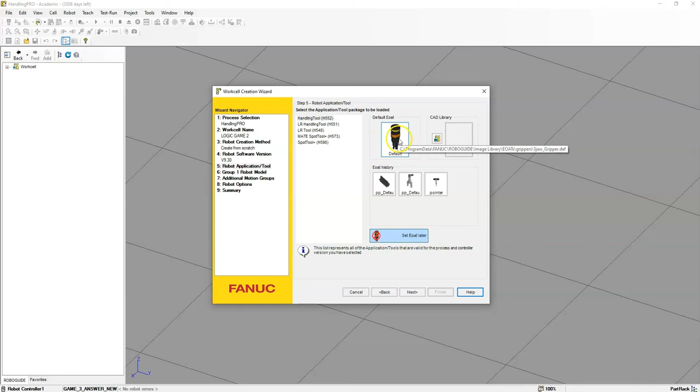a new work cell, handling pro, call it what it is. Pick your version and pick your tooling. So we're going to go to the 3-jaw if it's not already there. So we're going to go to grippers, find the 3-jaw chuck, and we're going to use the R2000 iC 165F.

And we're going to continue next, and then finish. And then we're going to allow this teach pendant to update. So the question about flange type, we're going to do standard. So we're going to go 1, enter, and allow the cell to initialize.

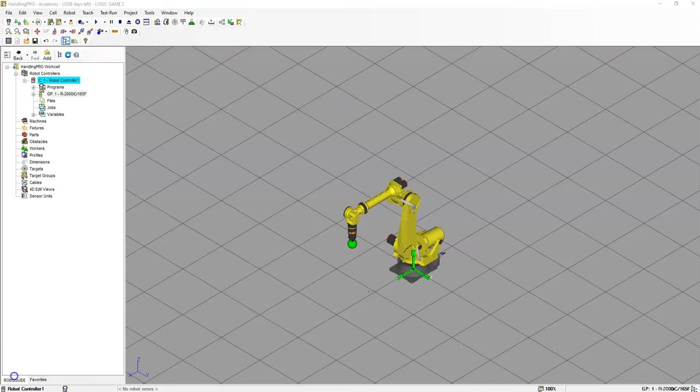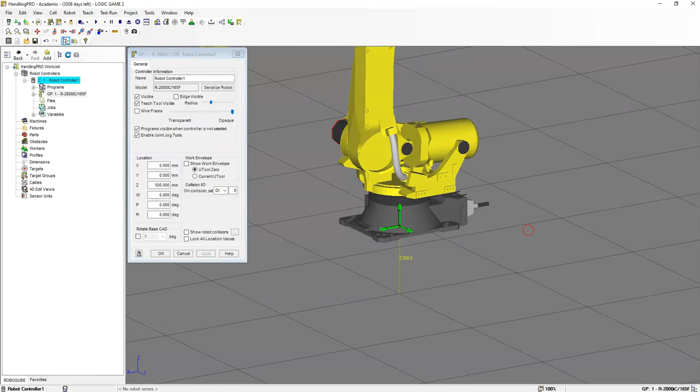Now that the cell is initialized, let's start putting together the cell, and this cell is the same between all the different logic games. So the first thing we're going to do is add a plate underneath our robot. So we're going to move our robot up 500 millimeters. So we bring her up, and we're going Z 500. So we're now 500 off the ground, and we're going to add a robot table to this.

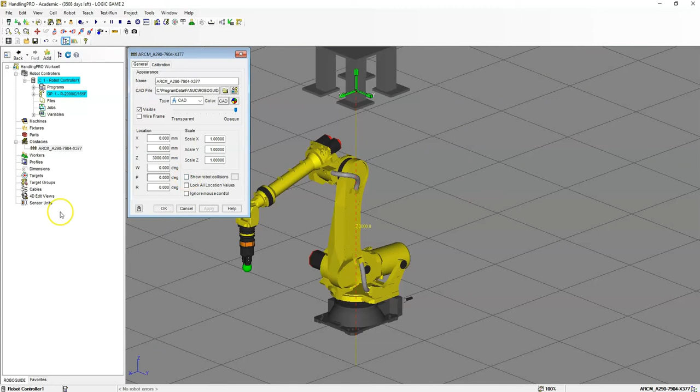So I'm going to go to cell, obstacle, CAD library, and we're going to go to robot bases, and we're going to use the first one here, which is the A290-7904-X377. We're going to bring it down so that the Z is 0. And we're also going to change the size of this as well.

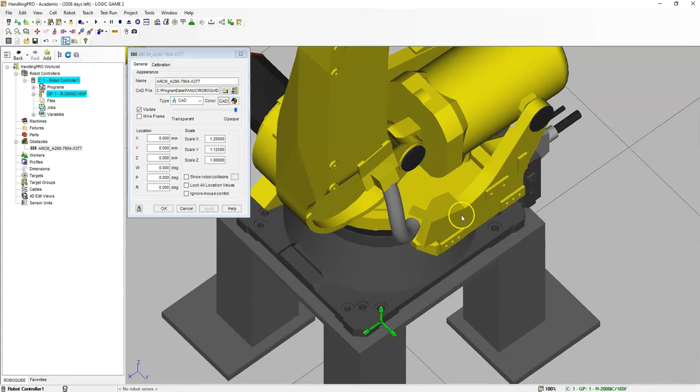So the size in the X is going to be 1.25. The Y is going to be 1.125. And then the Z is going to be 1. So when I hit apply, it now should fit perfectly on the base with a little bit of extra all the way around. So now that we have this, we're going to lock our location and hit OK.

Next, let's add the table. So we're going to go cell, add fixture, and then CAD library, and we're going to find the tables, and find the table with legs, and we're going to modify the size so that the X scale is going to be 1.25, the Y is going to remain 1, and the Z is going to be 2.

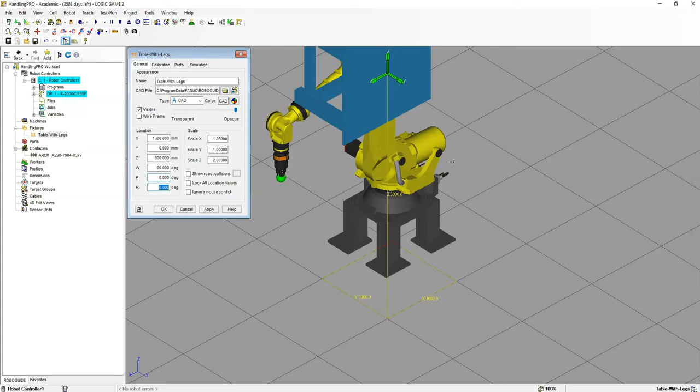Then the X is going to be 1600, the Y is going to be 0, Z is going to be 800, the W is going to be 90, the P is going to be 0, and then the R is going to be 90 as well. And when I hit apply, it should be directly in front. And I'm going to lock the location of this, hit OK.

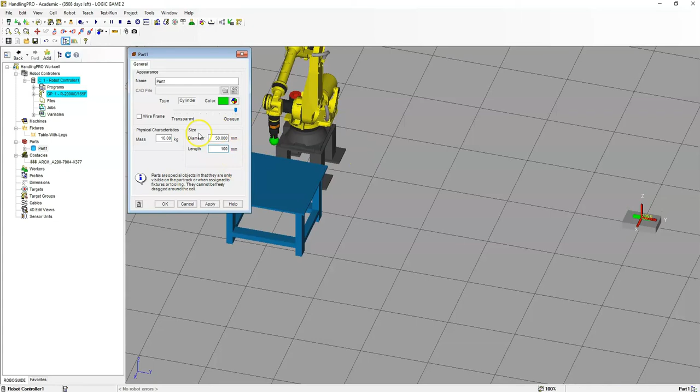Next thing we're going to do is create the part. So we're going to go cell, part, and we're going to create a simple cylinder, and we're going to change the size to diameter 50 and 100, and we're going to have a 2 kilogram mass for this.

Okay, so now that we have the main cell set up, let's now set up our main UTool. So let's double click our 3-jaw chuck. Let's go to UTool, and let's just make sure that the triad is the correct direction, where the Z plus is up, Y is to the right, and X is forward.

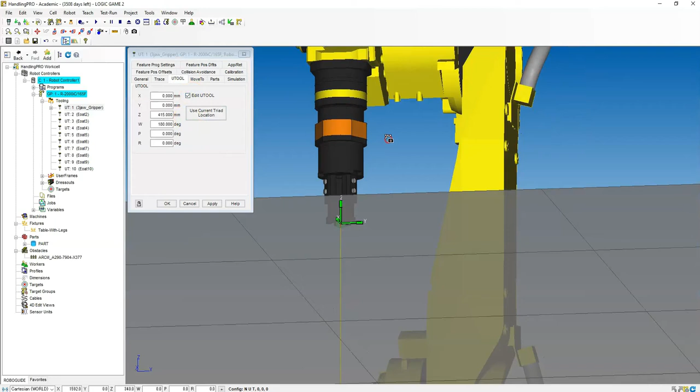Let's go edit tool, and let's just double check everything. Looks like everything is good, so we're at 415 Z, W 180. So if you need to modify that, you can use current triad location and modify these numbers. So let's hit apply on that. Let's go to parts, and we're going to add a part. Let's hit apply on that so we can see our part.

Now we need to modify the rotation of this. So we're going to edit part offset, 415, and we want to modify the W so that the triads are the correct direction. Right now it's downwards, so we need to modify this to -90. And now we have our triad Y positive.

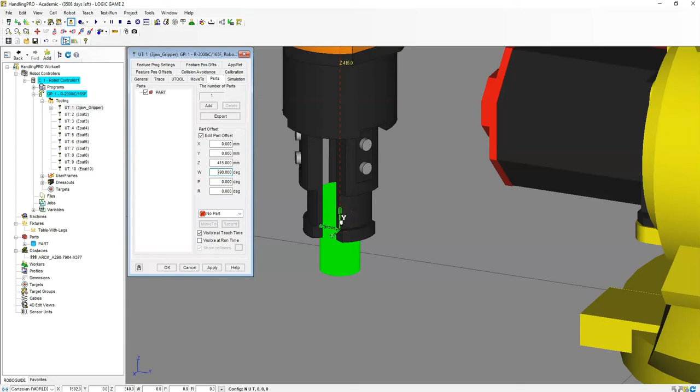And we just want to make sure that these are matching when we add it to the tabletop games scenario. So the Z is going to be to the left, the X is facing forward, and the Y is facing up. So let's hit apply on this. Let's hit OK. And now we're going to set up the actual jaws. So we'll hit the plus next to the 3-jaw gripper. And let's double click jaw number 1.

And we want to make sure that all these match. So it should be 0, 0, 0, 0, negative 90, 0, and those should be all good. We're going to go on the Z-axis. Let's go to the motion.

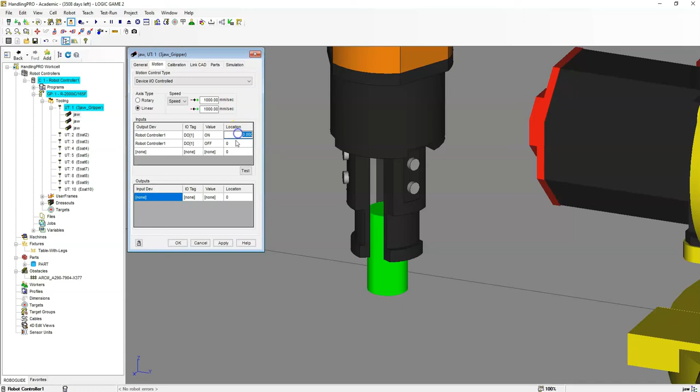We're going to switch this to device in and out, linear motion, and we're going to go speed of 1000, both forward and back. It's going to be a very quick speed, and we're going to be using robot controller number 1, and we're going to use digital 1 for our opening and closing. So one's going to be on, one's going to be off. So when it's off, it's going to be at our open position, and closed is going to be at 20.

And we can test that to see what that looks like. So off means it's open, on means it's closed. So if I go test, you can see it move open, and then if I go up here and go test, you'll see it go closed. So the open and closed.

And then for the outputs, we only need to put this on one of the jaws because they're going to go at the same exact speed. So this is going to be digital input number 1, and this is going to be digital input number 2. And both of them are going to be on, so location is going to be 0 and location is going to be 20. So again, we only need to do this for one of the jaws. So I do it for the first one, and you don't have to do it for any of the other ones. So I'm going to hit apply and OK, and let's set up the second and third jaw.

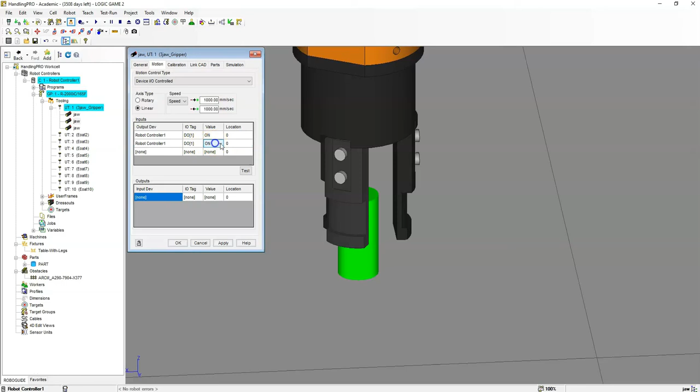So the same exact thing, go to the motion, and we're going to do a device in and out, linear motion, speed of 1000 millimeters per second. Output device is going to be still the robot controller number 1, so that they all turn on and go at the same time when we call for it. There we go. So now that is open. Now we're going to go to the next one. Remember, we do not need to put an input or an output.

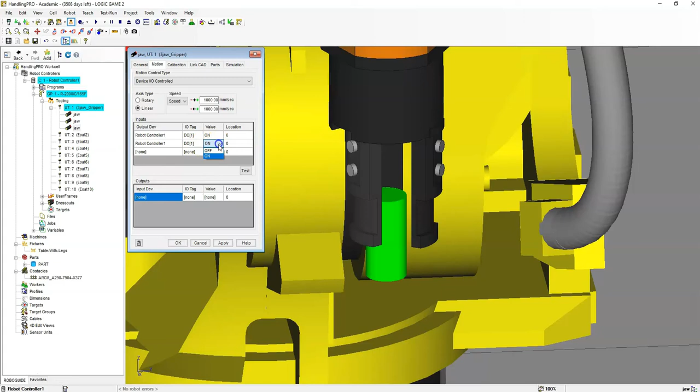Let's go to jaw number 3, and we're going to go device in and out, linear, speed of 1000. Robot controller number 1, and then digital 1, digital 1. One's going to be on, one's going to be off. On is going to be at 20. We do not need to put an output. So let's hit OK, and everything is now set up for our jaws opening and closing.

Let's create the simulation program for the gripper open and close. So let's go to Teach, Add Simulation Program, and we're going to call this one Gripper Open. And when the gripper is open, we're going to utilize digital output number 1, and that's going to mean we're going to be off. So we're going to wait for digital input 2 to be on. So digital 1 off, wait until digital 2. So we're going to hit play on that. Should remain open.

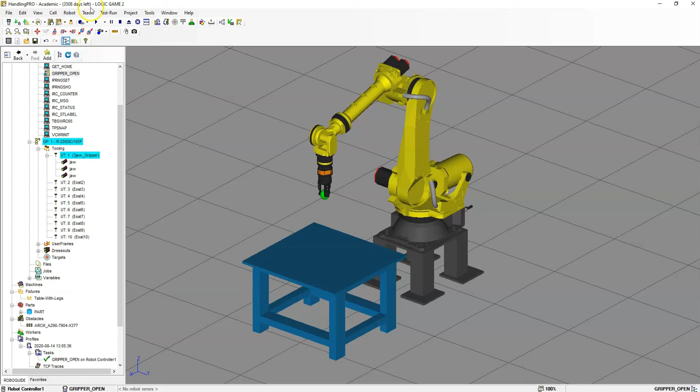Then let's start the close process. So we're going to go Teach, Add Simulation Program, and we're going to go gripper closed. Hit OK. And we're going to go digital output number 1 to be on, and we're going to wait for digital 1 to be on. And when I run this program, it should close. There we go. So now we have our opening and close program to call.

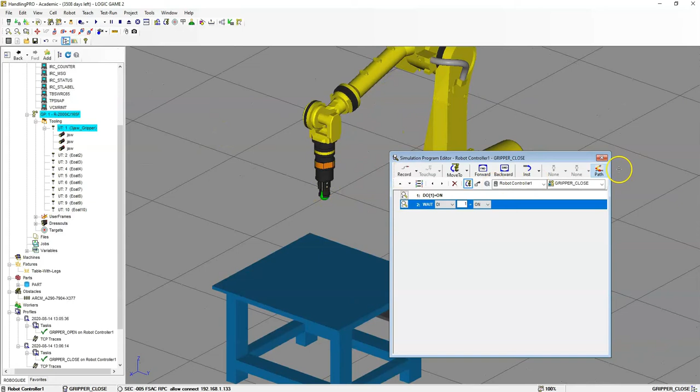Let's turn on Teach Pendant and set up some position registers. So I'm going to go to Data, Type, Position Registers, and we're going to go, first one is going to be Home Position. Next one is going to be Safe Position. Third one is going to be Game 1, so this will be the logic cell number 1. Starting point. Game 1 end. Then we have Game 2 starting point.

So I have my start and end for all 3 games because again, this cell is the same setup. It's just the board is just a little bit different. Then for position register number 10, we're going to do our tool offset. And then going down to number 12, this is going to be our game offset. So this is going to be game 1 X, Y offset, or you can just call it offset.

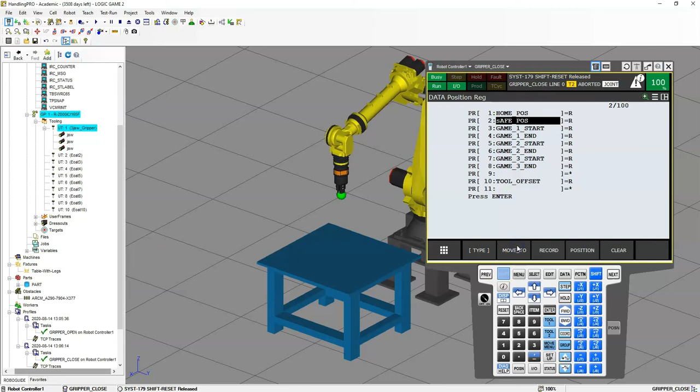For our safe position is going to be 0, 831, we'll just go 832, 356, 0, 0, and then negative 90. And if you want, you could just go move to, which will move to our safe position.

Let's go to our tool offset. So go to position, tool offset is going to be 0, 0, 0, 0, 0, 0, and then we're also going to change the Z tool offset to 200. And let's go to the game 1 and game 2 offsets. Let's go to position, and let's make that zeros down the board. Let's go to game 2 position, zeros down the board. And game 3 position, zeros down the board.

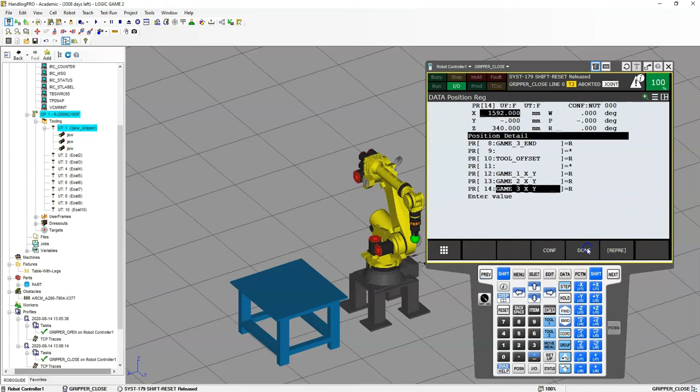Go to type. Let's go to normal data registers, and here we're going to type in. The first one is going to be our speed. Then we're going to have our column counter. Then our row counter. And if we need to, counter number 1. And counter 2.

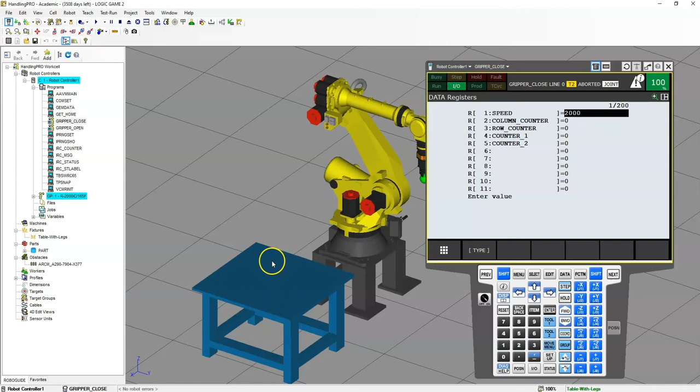And speed, we just set to 2000 right away. The rest will be utilized inside the actual program, so they can remain as 0. So now this is where the two cells are going to kind of start parting. In logic game number 2 and logic game number 3, this is where the board is going to be different, and the position registers for the start and end are going to be different as well, along with the programming.

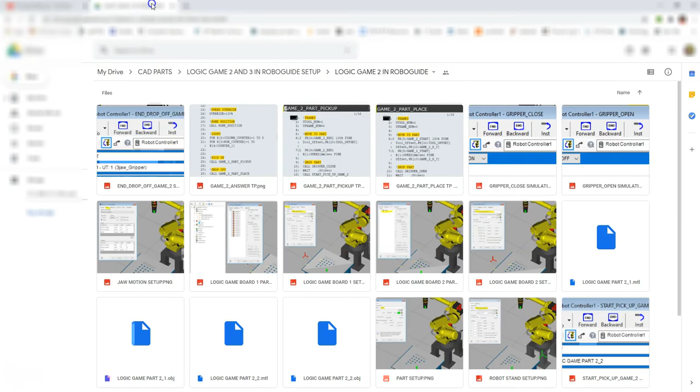Let's go find the parts on the web. Let's go to the YouTube page under the About. Find the one that says Cell Setup, Logic Game 2 and 3. It will bring you to this page right here. We want to download our part files. This also has setup folders as well with the programs. So I'm going to grab these and download them all.

Once I downloaded the folder, I placed and unzipped the folder into the work cell in my documents. So I have everything inside here, including all the parts and pictures inside this work cell. So here's my logic game number 2. Now when we bring in our parts, we're able to easily move them and export everything really easily. So let's go to cell, add fixture, and single CAD file.

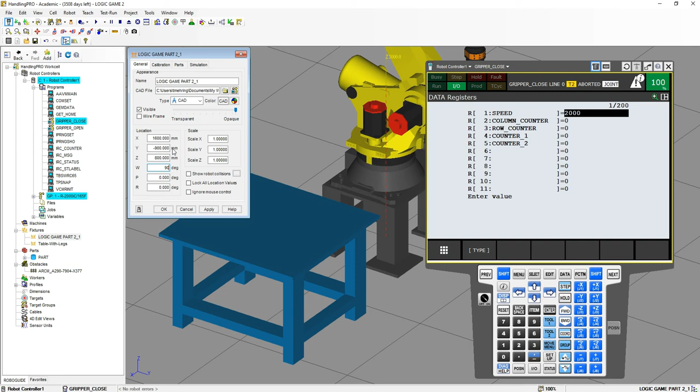We're going to go to the folder where your actual cell is being created, inside the folder that we downloaded, and we are going to load part 2.1. Hit open, and here are the coordinates for that: 1600, negative 900, 800, 90, 0, 90. When we hit apply, we will have our part in the correct area and the correct direction. So I'm going to lock the location and hit OK.

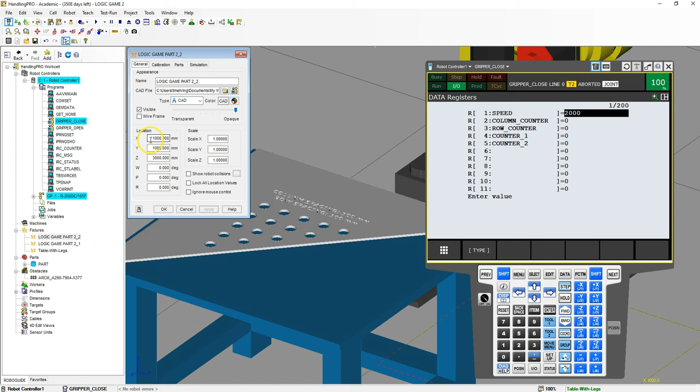I'm going to bring in the second part then. So we're going to go Cell, Add Fixture, Single CAD File, and Part 2.2. Hit Open. Then we're going to put in the same coordinates for this as well: 1600, negative 900, 800, 90, 0, 90. And now we have our part in the correct area. We're going to lock locations and values.

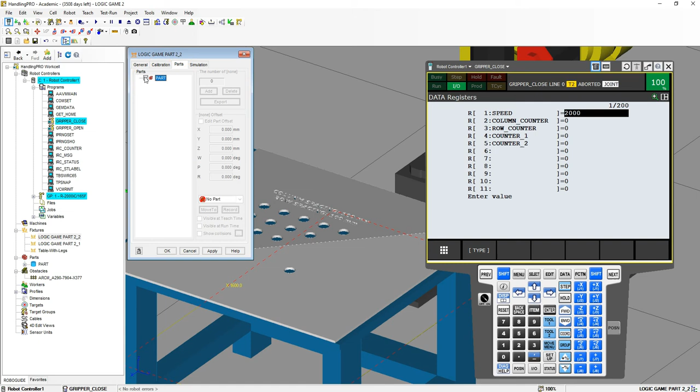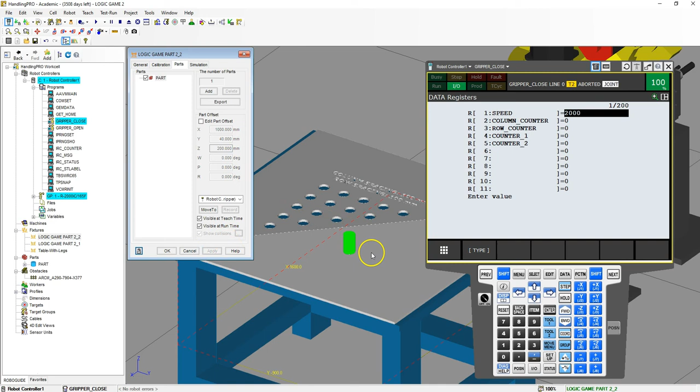Now let's set up the parts and simulation. Let's go to parts, and I'm in part 2.2, hit part, apply, and then we need to move that part to the correct area. We're going to edit part offset: X is going to be 1000, Y is going to be 40, Z is going to be 200, and the WPR is good because the Y is going straight up, X is going to the right, and Z is going forward. We're going to hit apply, and this is going to be the pickup area, so this is going to be visible at runtime.

Let's go to simulation, and we're going to click this part. This is going to be where it's going to be picked up. So let's uncheck place, and we're going to pick up, say every 2 seconds we're going to have one be created. We're going to hit OK, and now our pickup area is all good.

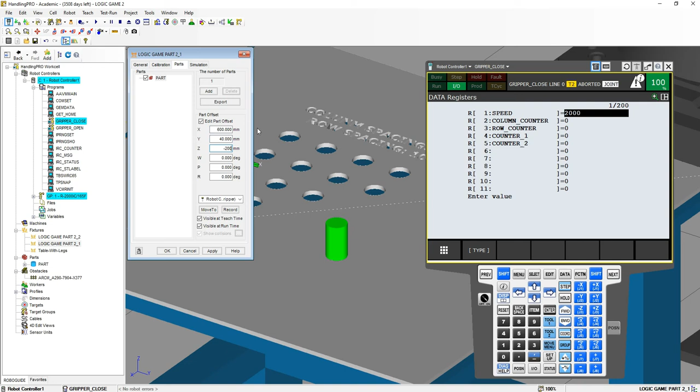So let's now move to part 2.1. Let's double click 2.1, and let's go to parts. Here's our part. The first thing we need to do is move it into place. So let's click our part. We're going to hit apply, and we're going to edit the part offset, and this is going to be 600, 40, negative 200, and it should be in the lower left corner.

Then we are going to go to simulate, click part, and this is going to be allowed to place. So we uncheck the pick and then the place, and we're not going to destroy after this amount of time. That means it's going to remain there after we place it until we're done with the cell. Let's go to parts then. This will not be visible at runtime, so let's uncheck visible at runtime for our first part.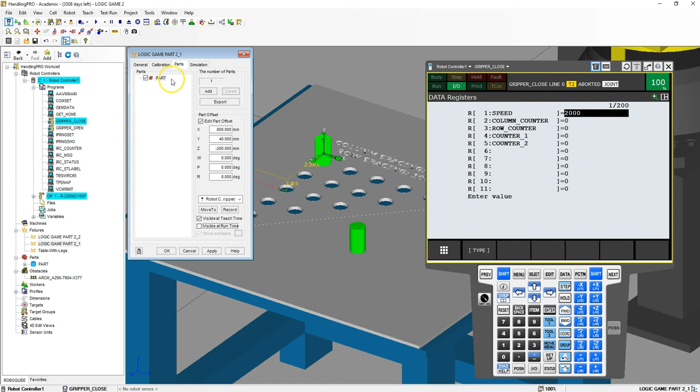And then we're going to array this. So let's go add, and we are going to do an array of 5, 1, 5. So 5 in the X, 5 in the Z, because it depends on the triad here. So X is this direction, Z is this direction. We're going to have a spacing of 100.

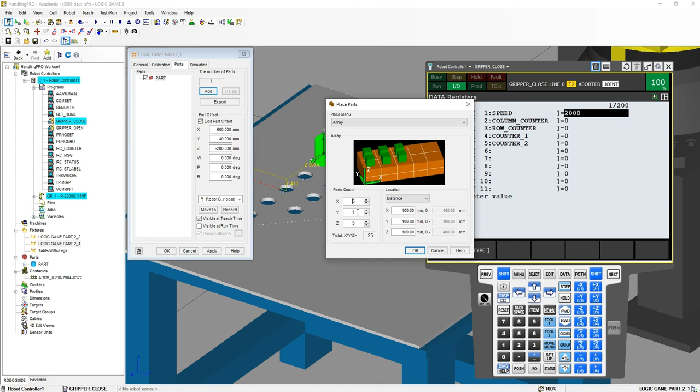Y doesn't really matter, so I just put 100 anyways because we only have one. So that means it's going to create just a single row for our array. Let's hit OK, and then we will have the total array. And here's where you now need to go through and delete the ones we do not need.

So for row 1, we're going to need all 5. So row 1, all 5. Row 2, we're going to have everything except the last one. So right here, 2.5, we're going to delete. We're going to uncheck the 2.5, and we're going to go to row number 3, in which we're going to do the last 2. So uncheck the last 2.

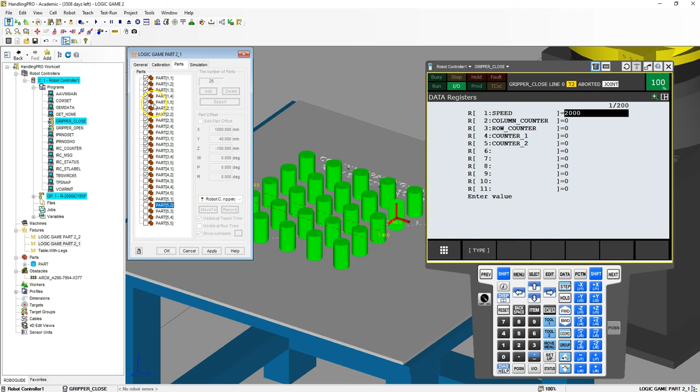And then row number 4, we're going to uncheck the last 3. And then the row number 5, we're going to uncheck the last 4, so you should only have 1 left over. So it should go 1, 2, 3, 4, 5, all the way down. So then when I hit apply, we will be left with just the angled rows.

And because we had these all set up before we arrayed it, you'll see all of these are invisible at runtime. Same thing with the simulation. All these simulations are going to be destroyed after 999. So these are all good. So we're going to hit OK. And the last thing we're going to do for this cell before we start looking at the pictures for the actual program is teach the position registers for the start and end.

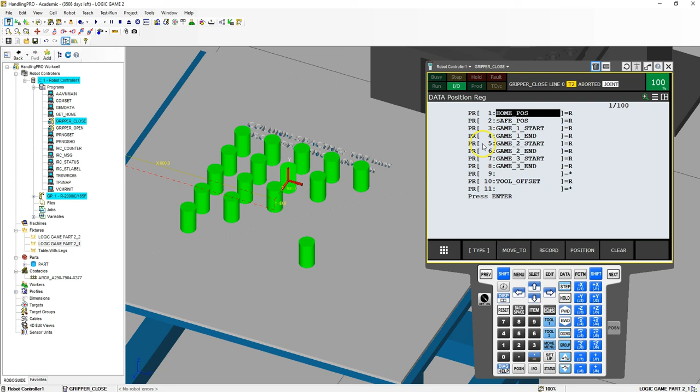So let's go to data, and let's go to the position register, and we're going to go here where it says Game 2 Start. So we're going to start right here. So I'm going to double click this piece right here, go to parts, and then move to, and it'll move to this position. So here's Game 2 Start. So we go shift record. So now that position is now recorded.

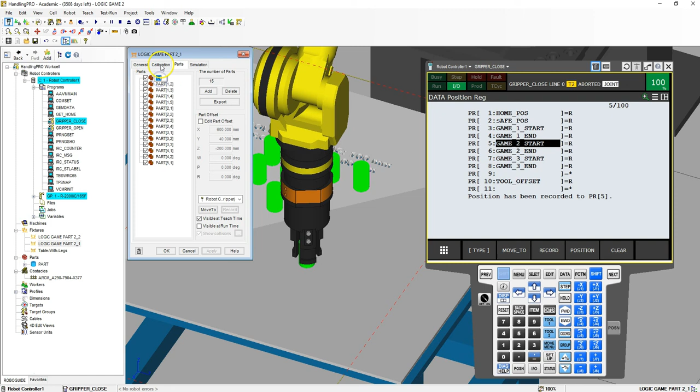Close out of here. Double click this one, and we're going to move part 1, 1. So we're going to go move to. There's the end part. So I go to position register number 6, and we're going to go shift record. So now those 2 points are recorded. So we have the start and end point. Hit OK. And then we need to start programming.

So we'll create the 2 simulation programs for pickup and close. So we're going to go to Teach, Add Simulation Program. And this simulation program is going to be, since we're at the end here, we're going to call it End Drop Off Game 2. So End Drop Off Game 2. Hit OK. And this is going to be our drop off.

So we're going to instructions, we're going to drop, and we're going to drop the part, and there's only one area we can drop it, which is Logic Game Part 2_1. And make sure that the part says asterisk in there. So it'll default to asterisk, but just double check to make sure that it is. So then we're good on that one.

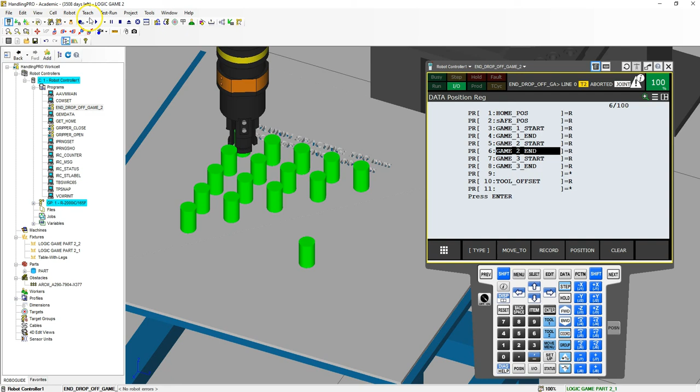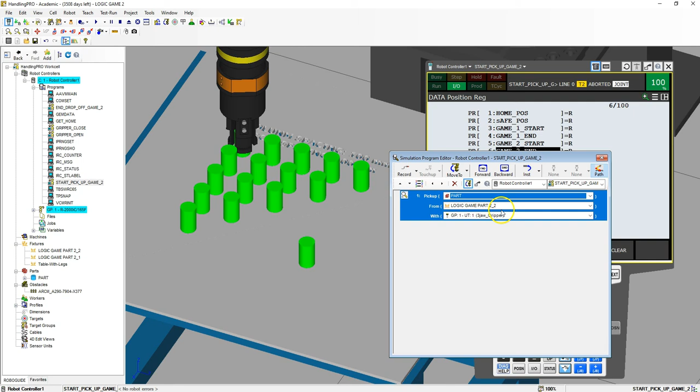So let's then go Teach, Add Simulation Program, and this one is going to be the Start Pickup area. So Start Pick. Hit OK. And this is going to be our pickup. So let's go Instruction, go Pickup, and we're going to pick up the part from Logic Game Part 2_2 and with the 3-jaw chuck.

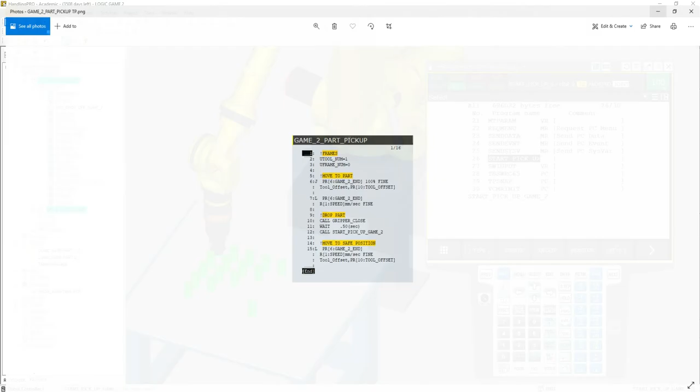Okay, so now we have all the simulation programs, and now you have to create the Teach Pendant programs by going Select and then Create, and here are the Teach Pendant programs. So inside that folder, you'll be able to see each of the different programs. So the Game 2 part pickup, you're going to create with U-frame 0 and then U-tool number 1. And then you're going to go to the position register with the tool offset. Then you're going to pick up and then move to the safe position.

And then here's our part place program, much like the pickup program, but instead of the pickup gripper being closed, we're going to have our gripper open and drop-off program number 2. So this is a simulation program. So this is Game 2 part place. Then you will need to create the answer. So here is the example for the answer. So we have Game 2 answer.

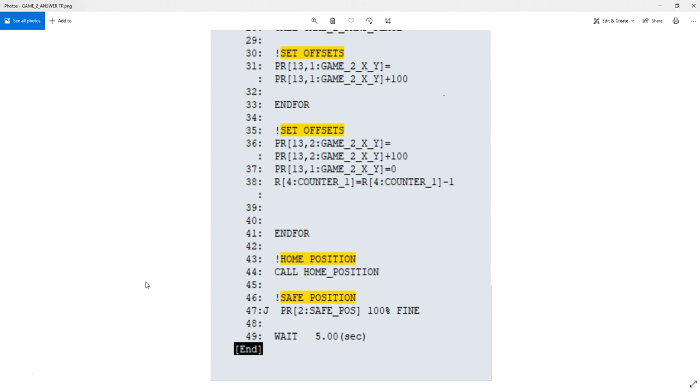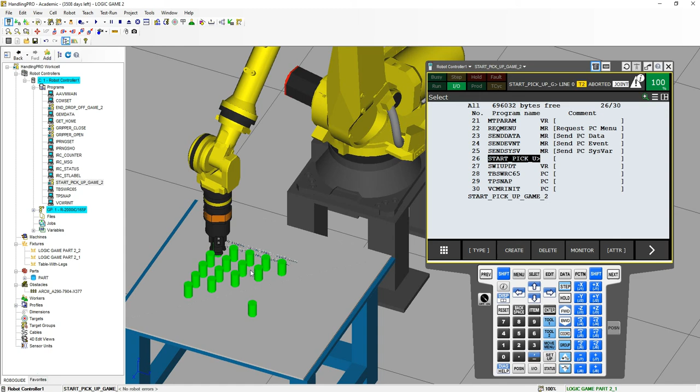And again, this is not the only way of doing things. There's other ways of creating the program. This is the way that I did it. Doesn't mean it's the only way of creating. And that's the Game 2 answer. So once you're done programming, then you should have the entire program picking and placing where it needs to be. So think about what you need to do for the logic in order to pick and place, subtracting and adding as you go. And that is logic game number 2.